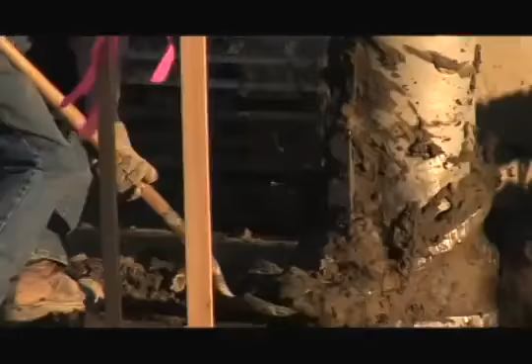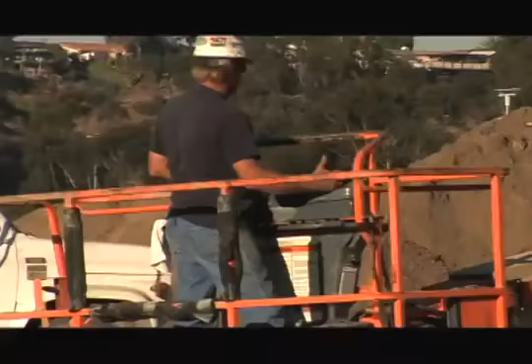I definitely played in the dirt when I was a kid, and still do today. The most pleasant thing about this field is that you're not stuck behind a desk. Every day's a challenge, every job that I have is different. You don't spend your whole day in the office looking at a computer screen, you get to go out and see the construction as it happens.

The ever-increasing demands of modern civilization and burgeoning population centers around the world have intensified the need to build longer and bigger bridges, taller skyscrapers, and stronger levees. But often, the ground we choose to live on is not as stable as we think, or as safe as we would like.

Without solid ground to build on, all of this can be wiped out in just a few seconds.

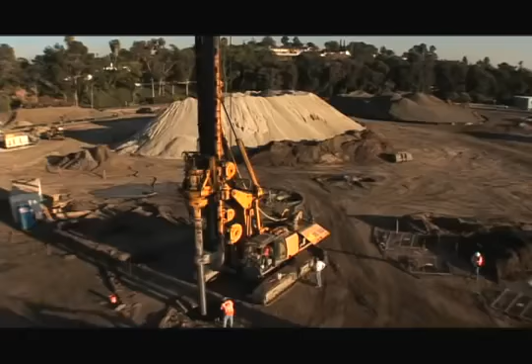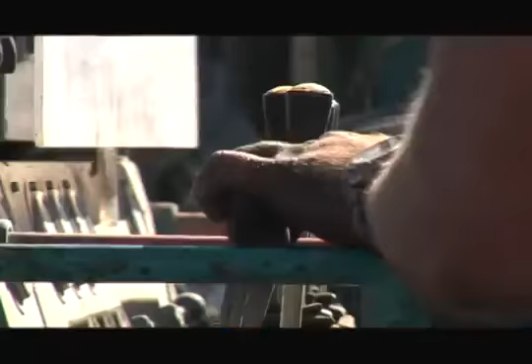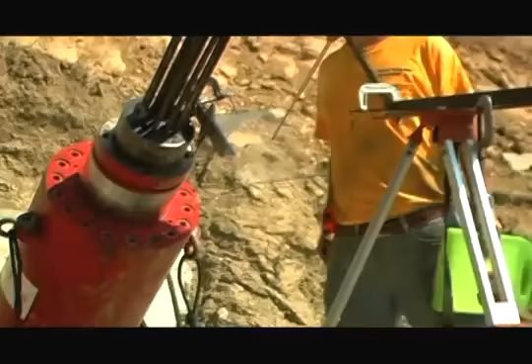Today, every construction project must begin with a study to determine how the ground will behave when a structure is built on a specific site. The specialized mission of geotechnical engineering is to study precisely how the ground behaves. Most people on Earth don't know what geotechnical engineers do - it's essentially dirt with numbers. The job of every geotechnical engineer is to identify both existing and potential hazards, and to provide efficient and cost-effective solutions to ensure that the visions of architects, contractors, civil engineers, and designers can coexist with the realities of the earth and of nature.

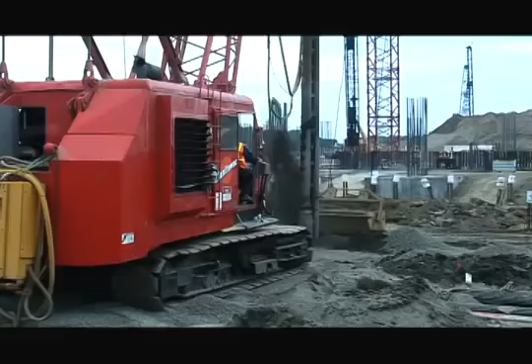Geotechnical engineers deal with things below the ground - that's what our job is about. It requires a lot of problem-solving skills.

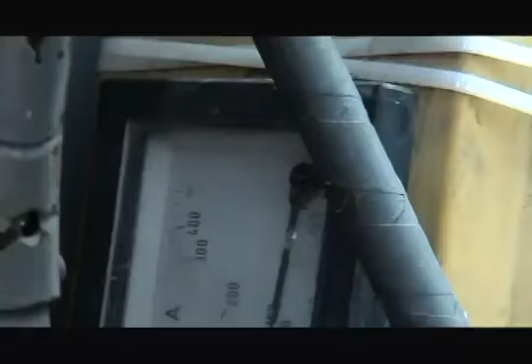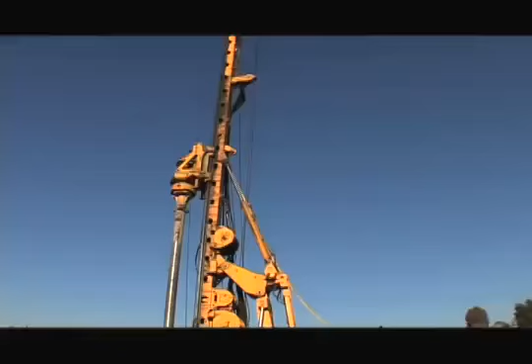There are always some kind of problems involved with developing a piece of land, whether it's for a big structure or a lot of houses, and the answers aren't always obvious because you're not just cranking answers out on a computer. You have to draw on your experience and the experience of others to find the solutions to the problems, and then try to keep them economical, because part of engineering is coming up with economical solutions to problems rather than just spending your client's money like there was no end to it. So we do geologic and geotechnical investigations of these hazards and then develop ways to mitigate them.

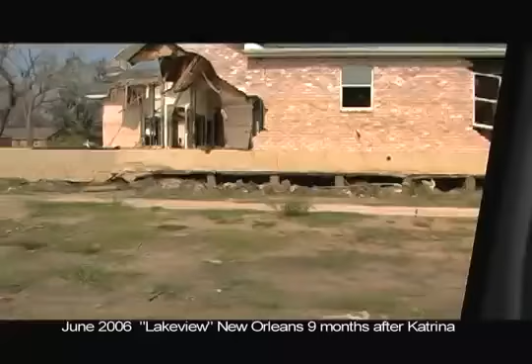After ravaging large parts of New Orleans and surrounding areas, Hurricane Katrina posed a number of unique geological and geotechnical challenges to engineers charged not with simply repairing existing damage, but with determining how to make improvements to prevent similar catastrophes in the future.

The morning after Katrina, when the rains had kind of slowed down, people were starting to wonder why the water was still coming up in their neighborhoods. That was partly due to all the levees along the canals here in town that they used to evacuate rainwater from the city out into Lake Pontchartrain having breached.

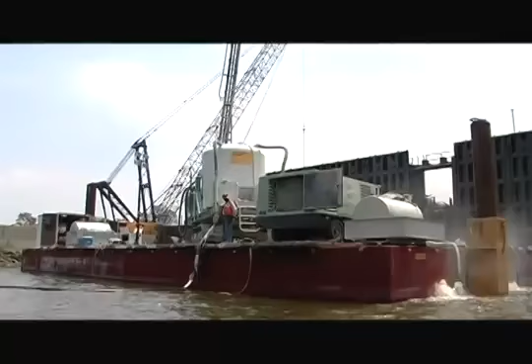So one of the things they're looking at is increasing the heights of the levee. Well, unfortunately, the soils here are not strong enough to support any additional load. So that's one potential use of the deep soil mixing method - it can be used underneath these levees to allow them to build them a couple of 2-3 feet higher.

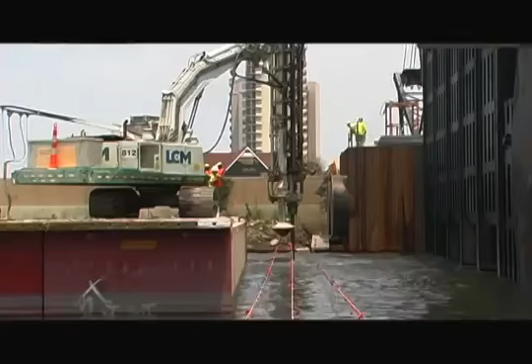It's a new method. It's only been employed in the United States a few times, since it's not so widely known here. So you have to really use innovative ideas to solve these problems.

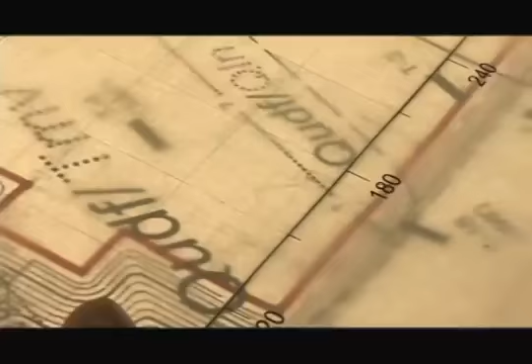You have to have good reasoning skills and good common sense to avoid being overly conservative when you're designing a project, yet you have to keep the public's safety foremost in your mind. So you don't want to allow the client or the builder to build a project that isn't going to be safe for the public, because that's our ultimate client.

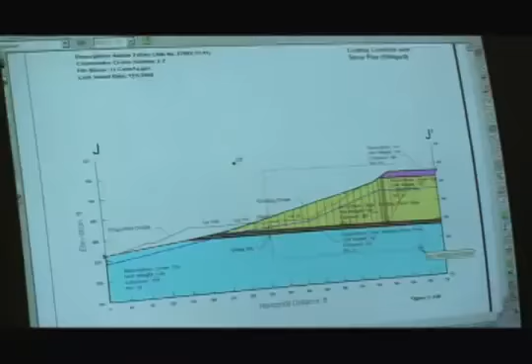We're just trying to protect the people that are going to be occupying the buildings that we're helping to design. So basically, we're just trying to save lives.

Maintaining public safety in a major earthquake zone such as the densely populated San Francisco Bay Area confronts geotechnical engineers with numerous complex and demanding problems requiring new and innovative solutions. Geologists know that it's not a question of if another major earthquake will strike the metropolitan Bay Area, but when.

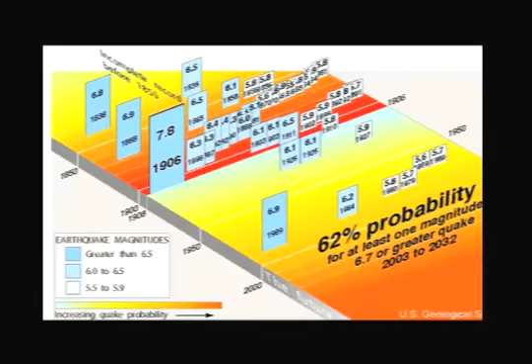One of San Francisco area's greatest assets is the Bay Area Rapid Transit System, also known as BART. The crown jewel of the BART system is the Transbay Tube, which was built over 30 years ago. This year, BART initiated a variety of studies to evaluate the potential vulnerabilities in the gravel backfill around the Transbay Tube.

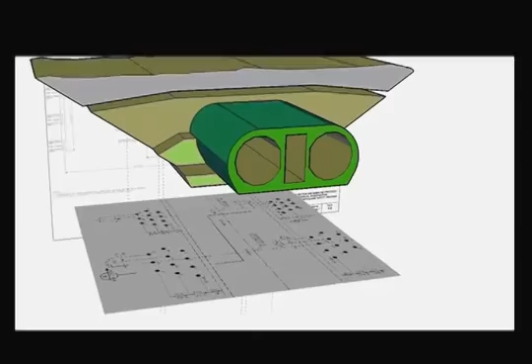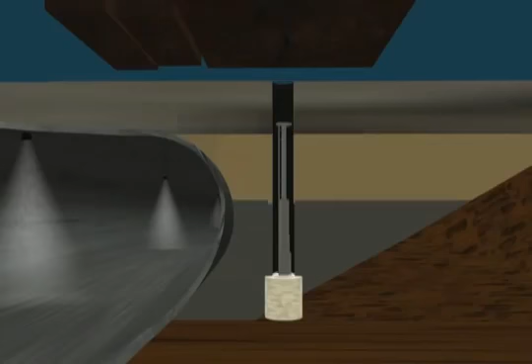They hired a team of highly experienced geotechnical engineers who decided to use the vibro replacement technique to build columns to densify the fill to prevent liquefaction during an earthquake. The engineers have to rely on the most advanced technology to position the probe in the required location.

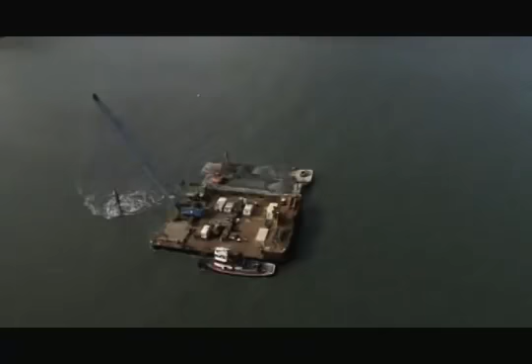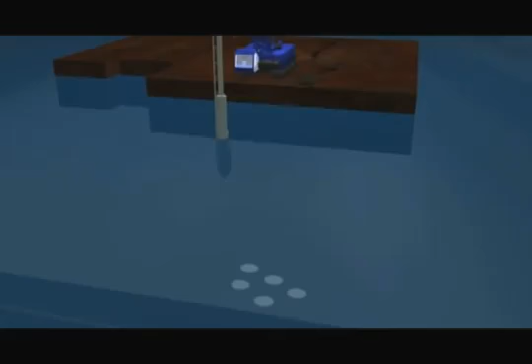This project presents a new level of difficulty in conducting the work. There are no benchmarks floating in the bay, nor are there markers delineating where the tube is. The probe has to go blindly through up to 90 feet of open water before it reaches the soil on the bottom. All this while the trains are running through the tube, with all the risk involved in case of an error.

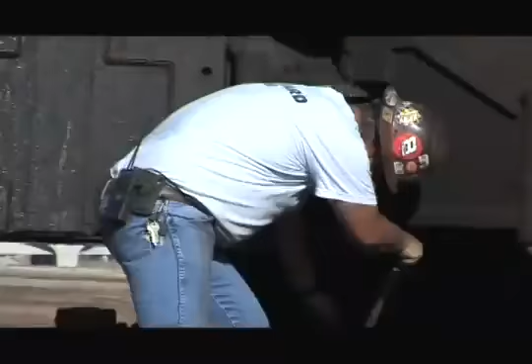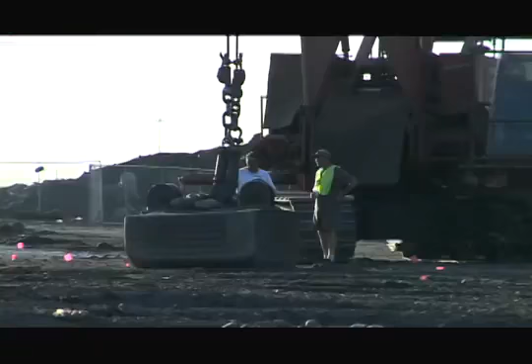My work can save lives by thoroughly investigating a site and determining the type of materials that are out there, and if an earthquake were to occur, help mitigate the potential for seismic loads on buildings. The sense of pride lies in knowing that you did a good job in putting up a structure that is going to be sound even under earthquake conditions or other adverse conditions that might otherwise impact the structure, and that it's going to stay standing.

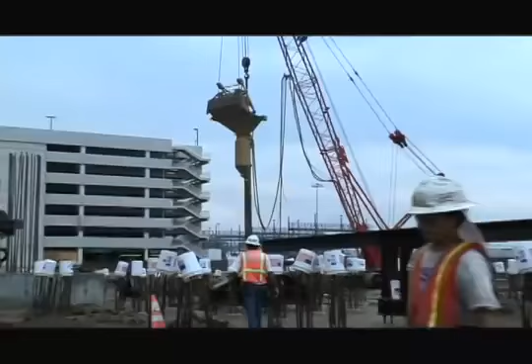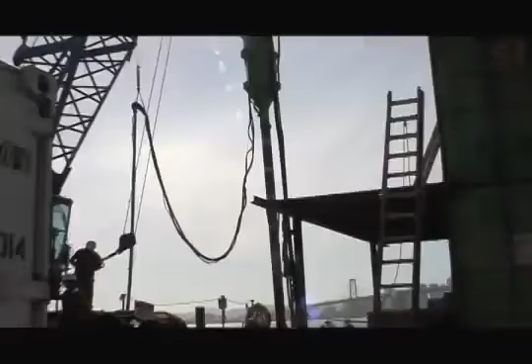It seems as though we really do need more geotechnical engineers. It is a very interesting and gratifying career. You get to deal with the contractors, you get to deal with clients. You still deal with all aspects of civil engineering, but you get to get out into the field. It's a branch of civil engineering that should be looked at and should be taken more into consideration.

There is a nationwide shortage of engineers of all types, and in geotechnical engineering it's worse. Weekly or monthly, we're getting phone calls from professional recruiters, from other companies, just trying to get you to go to their company and look for the greener pasture.

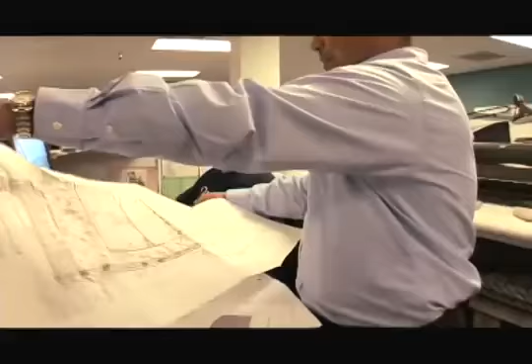As soon as you graduate, of course you don't have a lot of experience yet, but still, companies realize that they need to get younger people into their profession, and so you're still getting hired even though you don't have all that experience behind you yet. So they're willing to take their leap of faith that you're going to be a valuable employee just based on the 4 or 5 or 6 years of college preparation that you've done.

We go to great lengths to try and find qualified candidates, and there are so few available right now that it would be a good career to pursue if you're interested in getting a job right out of school and continuing through. Do you want a challenging and fun career?